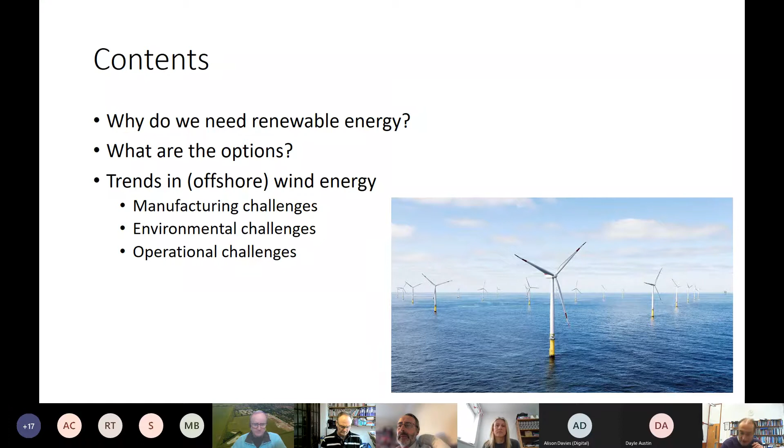So, as I say, you're probably very familiar with this, but sometimes it's useful to remind ourselves of what the challenges are and why we're doing this. The graph on the left is showing two things really: the growth in population, which we're very familiar with, and also the growth in energy use over the last 150, 170 years. Clearly, energy use is growing faster than the population, so the pro rata use of energy is increasing. As we become wealthier, more developed, we're each using more and more energy. And that's leading to more and more CO2 emissions.

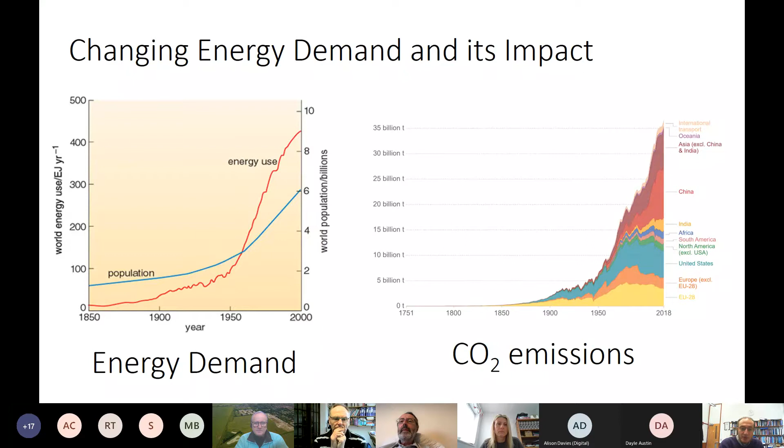The graph on the right is showing how that's split between different regions. Actually, Europe and the US, in a sense, are doing okay. They are reducing their carbon emissions, but places like China and India are still growing quite strongly, and the overall total is growing hugely. So you'll be familiar with some of this, but it's good to remind ourselves from time to time. This shows the projections of what that might lead to.

So the solid line at the left of this shows what we have been doing for the last 30 years. The projections going forward are what the options might look like depending on what we do from here on in. And essentially, starting at the top, if we hadn't done anything to reduce our carbon emissions, then we'd be looking at a 4 to 5 degree temperature rise.

Fortunately, we are doing some things. So current policies, if they're maintained, would limit the temperature increase to around 3 degrees. If politicians and others fulfill what they say they'll do, then that brings it down to 2.5 to 3 degrees. But that's still a long way short of where we need to be, which is really the 1.5 degree pathway. So it's still a huge amount of work to do.

And just in terms of what those temperatures mean, even 2 or 3 degrees, as we're already starting to see, is more forest fires, more droughts, more extreme weather. So the importance of addressing these, I think, is coming home to people, and policies are moving in the right direction, but there's still a long way to go. And policies only go so far. If you haven't got the technology to deliver on some of those things, the policies can't really achieve very much.

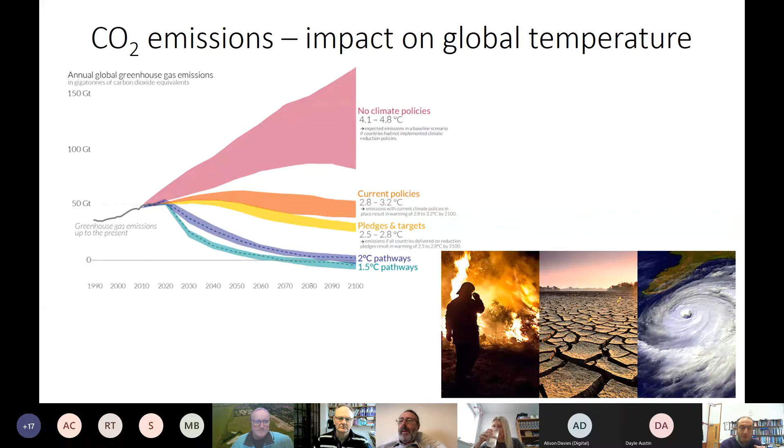So clearly, there's a demand for renewable energy, and there are options available to us. So I've not really thought about what does renewable mean. I think quite a useful definition of renewable energy is a source that's replenished on human timescales. So things like solar are kind of instantaneous. Biofuels might take a year to grow something and replenish it. So that kind of is replenished on a human timescale.

But if you think about coal, you're then talking about millions of years, and so it isn't replenished on a human timescale. So if you're looking for how to demark renewable and non-renewable energy sources, then I think that's quite a useful way of thinking about it. And these are the main options available. So wind, marine is wave and tidal, which I'll say a little bit about. Solar, we're familiar with. Hydro, we're very familiar with. Geothermal, extracting heat from the ground or maybe the air. And then various sorts of bioenergy.

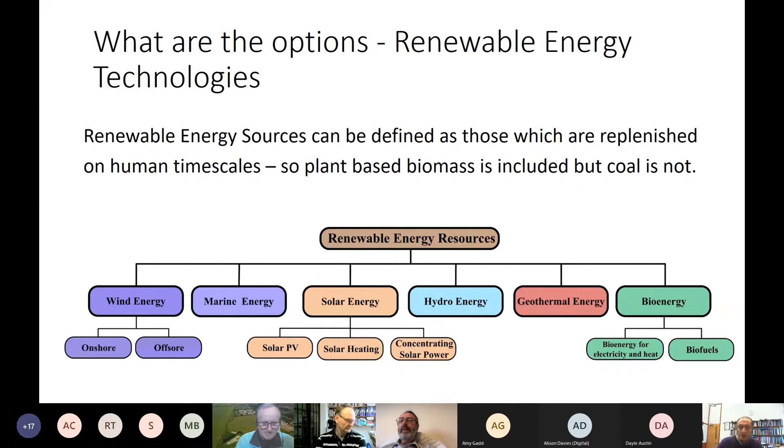And all, I think, have their place in the future energy mix. But it's also important to think about what are the advantages and disadvantages of each of them in general and in the UK specifically, but also in terms of how much energy they can actually provide. And I think this is quite a useful illustration to understand that. So essentially, the size of these circles represents the amount of energy that's available. So if we captured all of the available energy, how much would that be? And the numbers shown, let me just get a pointer, are illustrating how many times over that source of energy could fulfill the world's needs.

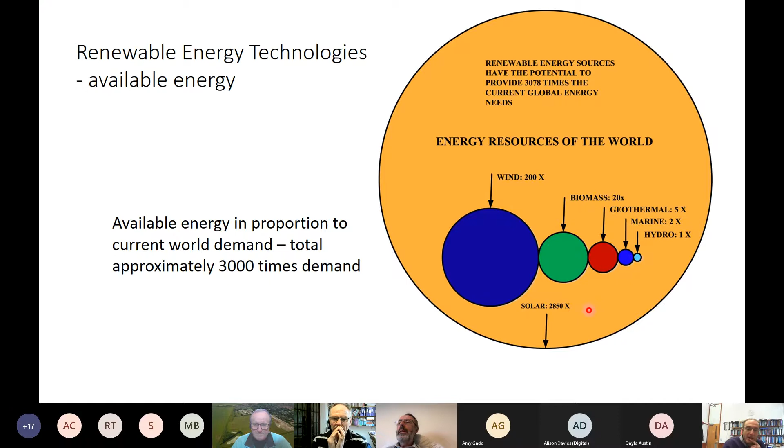So for instance, solar energy could provide all of the world's energy use 2,850 times over, which is great. It would mean covering the whole Earth with solar cells. So there's a limit to that. If you look at wind, it could provide 200 times the Earth's demand, biomass 20. But if you look at hydro, even if you exploited all of the hydro energy that is out there, we would still only meet the world's demand once over, and there would be no spare capacity there. So I think it's important to understand how much of these different sorts of energy there are, and one way of thinking about that is thinking about where the energy comes from.

So apologies, this is rather a busy diagram, but what it's meant to be showing is where the ultimate source of energy is coming from, and what kind of transformations it has to go through to be usable. And as it goes through each of those transitions, we lose a proportion of the available energy. So the more transitions it has to go through, the less energy there will be available at the end of that. So, for instance, the main source of energy for the Earth is the sun, and so if we directly convert the sun's energy through solar converters, then we get a lot of energy because it's a very direct process.

If you looked at the wind, for instance, you require the sun to generate winds and the Earth's rotational energy to shape it, but that's quite a direct transition, and so we get quite a lot of energy in the wind. But if you look at hydro, you need the sun to evaporate moisture, you need the wind to transport it from over the sea to over the land, and those processes are quite inefficient. So by the time you've got water ready for your hydro system, it's got a very small proportion of the original energy that was put into it, and so it's not able to supply a large proportion of what's required.

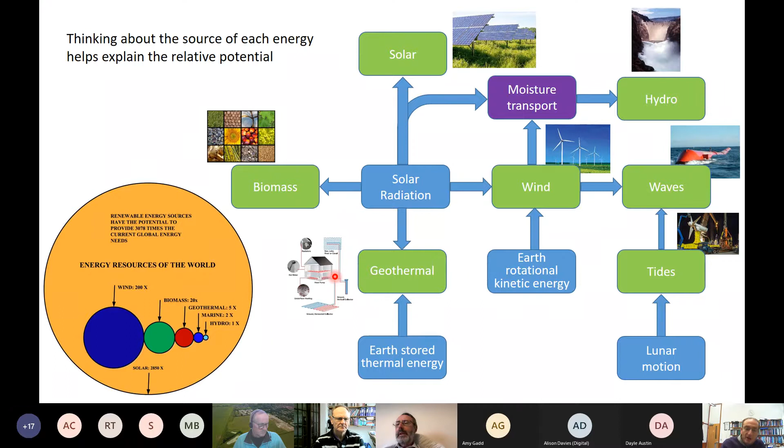I'll say a little bit more about wind energy, and then look at how we do the comparison between different energy sources. As you'll be aware, the wind is driven by the sun warming the atmosphere, and then that movement of air is shaped by the rotation of the Earth. The Earth drags the atmosphere around with it, and so we get these quite complex patterns of winds around the Earth, and different regions obviously have different patterns of wind energy.

That's also shaped by the local topology, the land surface, and particularly the roughness of the Earth affects how much wind energy is available. And it just so happens that the UK has some of the best wind resource in the world. This map on the right-hand side shows how much energy is available in different regions from the wind. Rather confusingly, red means there's not much energy at all. Yellow and green means there's lots of energy.

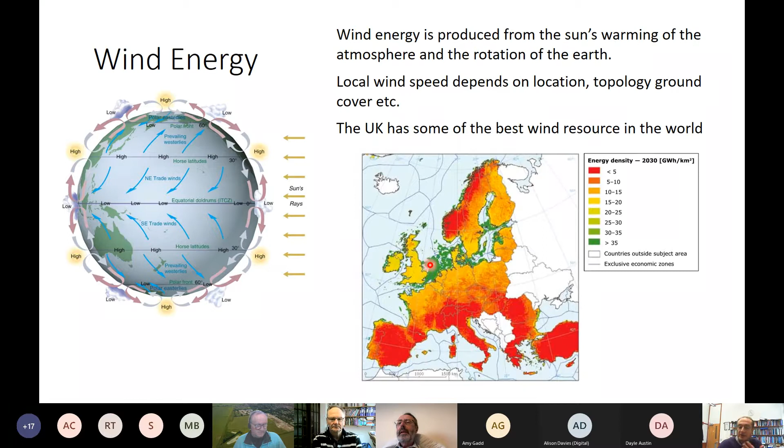And so the best places in Europe and actually in the world are in the North Sea, which is very convenient for us. It's also very convenient that the North Sea happens to be very shallow, and so it's relatively easy, I say relatively easy, to exploit that resource.

As an engineer, I couldn't avoid putting one equation into a presentation. This is an equation for the power that you can get from a wind turbine. I only put this in because it's important to understand the key factors in getting as much energy from the wind as we can. The power is a half. CP is just a measure of how efficient our turbine is, and there's a limit to that. You can't get more than 59% of the available energy out of the wind.

Rho is the density of the air. We can't do much about that. AT is the area of the rotor. So if we can make the rotor bigger, we get more power. If we double the radius, we get 4 times as much power. And then the key one is the wind speed, U cubed. If we double the wind speed, we actually get 8 times as much power. So what we really want is large turbines, big AT, and high wind speeds.

You'll probably be very aware of how the size of turbines has increased over the last few years to an incredible extent. We now have turbines getting on for 10 times the size of what they were even 30 years ago. That increases the area, but making them taller also increases the wind speed, because the wind speed increases as you go further up.

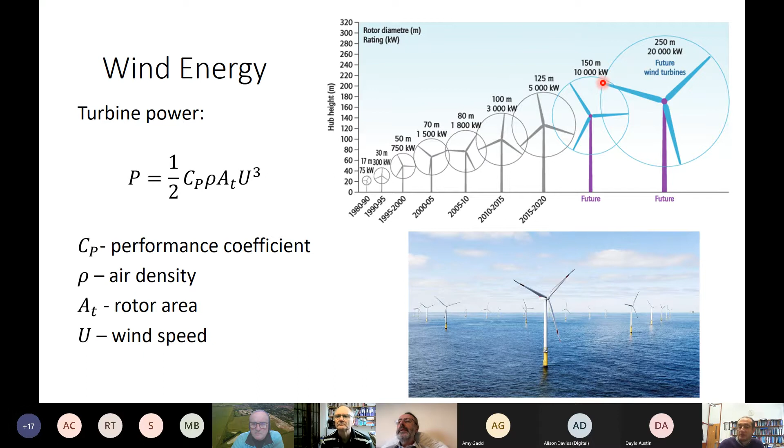Similarly, for oil, natural gas, they all have relatively large amounts. Obviously, there's lots of talk about carbon capture and storage. So, you burn coal or gas, but you capture the CO2 that's emitted. One of the issues is that even the most efficient current processes are not that efficient. They don't capture all of the CO2. So although the CO2 emissions are a lot lower, they're only maybe 80% lower than if you burnt that fuel without the carbon capture. So even with carbon capture and storage, there's still relatively large CO2 emissions.

Nuclear, as you would expect, is quite low. Biomass is not so low, because there's a lot of fuel used in transportation, fertilizers, and so on. Solar is quite a lot, because there's actually a lot of energy used in the manufacturing processes. Geothermal is relatively good. The best ones in terms of CO2 are onshore and offshore wind.

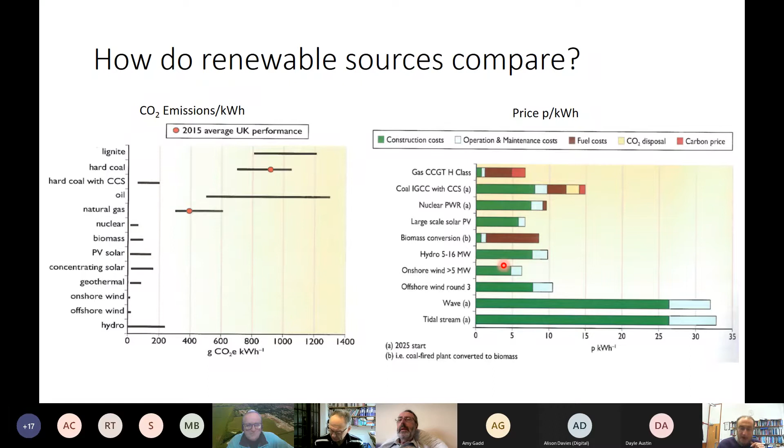One other comparison, which I'll show, it's a little bit less appealing, is around the health and safety of these different renewable energy sources. And one measure of that is the number of people who are killed in the process of generating that power. As I say, not a particularly nice thing to think about, but it is important in the overall picture. And again, some quite surprising comparisons. So if you look at those technologies, it's not obvious which are the safest and which have the biggest issues around health and safety.

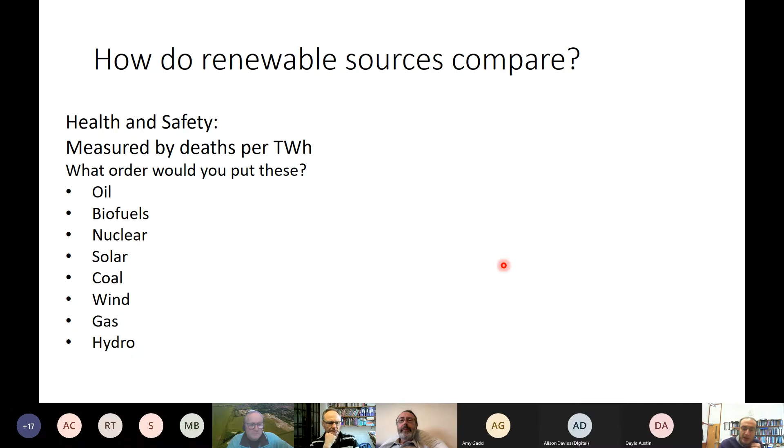And if you look at the data, what it shows is that actually the worst is coal, because there are lots of people killed in coal mines, particularly in some areas of the world where health and safety rules are not so carefully applied. Similarly, oil is quite a dangerous industry. Nuclear, you might think, is a very dangerous industry, but because it is so dangerous, it's so well regulated that actually it is a very safe industry.

Hydro in itself is relatively safe, but as we've seen a few times, unfortunately, when a dam fails, potentially there's a very large impact and potentially large numbers of deaths. Solar, the issue there is people falling off roofs while installing solar panels. Wind is relatively safe, and again, that's partly because it's quite a well-regulated, well-managed industry.

What I would say is some of these figures are a little bit open to challenge. So, for instance, nuclear, there are direct deaths and then there are indirect deaths. So depending on who you talk to, the effects of the Chernobyl nuclear disaster were officially 31 people were killed in that, but obviously there are lots of people killed because of the radiation and the fallout from that. So these are open to some challenge.

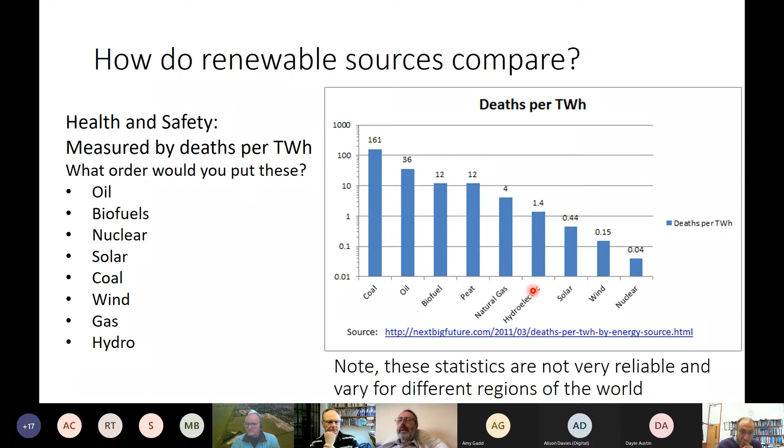Okay, so hopefully that's kind of established that wind energy is one of the key things, and particularly in the UK is one of the key things. So moving to how that sector is developing, there are really 3 elements. One is that they're just getting bigger and bigger. So the rate of increase is incredible.

So I work closely with the blade factory in Hull. When it was opened, I think 3 years ago, they were making 75-meter blades. They've since had to knock the end walls out to extend it because they're making 83-meter blades, and now they're starting to look at 110-ish meter blades, and other manufacturers are doing the same. So these things are huge structures, very difficult to manufacture cost effectively, difficult to transport, difficult to generally deal with.

So getting bigger, getting into more remote locations. So there's a number of drivers for that. So as you move further from shore, the wind becomes stronger and more consistent, and that's one of the things that you really need is strong and consistent wind.

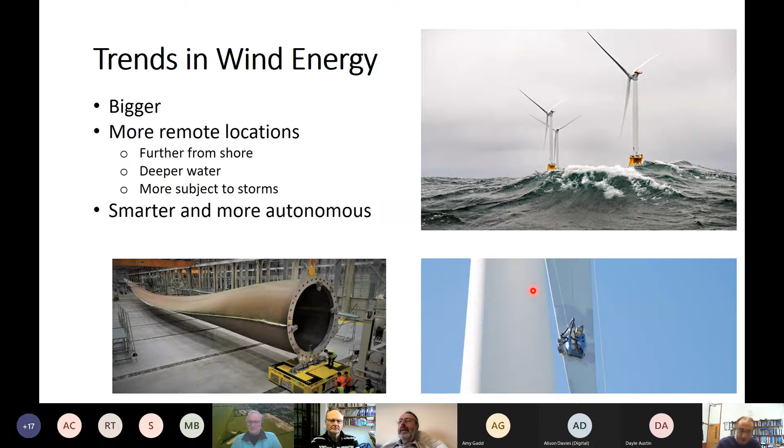So just picking apart some of those, I'll talk about some of the manufacturing challenges first. And this is something where I've been doing quite a bit of work to try and improve the processes and understand some of the processes. And again, these things are huge. They're quite, in some ways, simple structures.

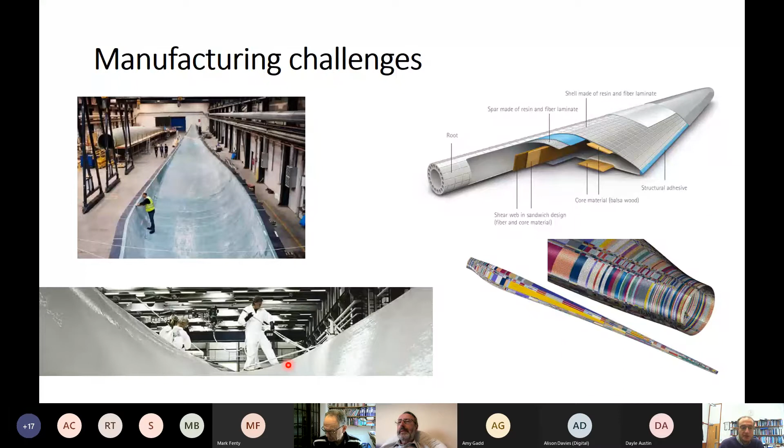You lay up all the layers, close a mould, and then inject epoxy resin into it that then cures and makes the solid blade. So it's a mixture of quite a lot of manual processes and then some limited automation, but trying to improve that, make it more consistent, more automated is quite a big push within the industry.

What would be nice is if we could get nice smooth wind that was flowing consistently all at the same speed. But what you actually get is different winds at different heights. So as you go up in the atmosphere, generally the wind speed increases, but it's not smooth, it's turbulent, it's mixed. And so this turbine gets buffeted by changing wind speeds. You get things like low-level jetting, where you get extreme winds at relatively low levels that then cause a big effect.

You have things like ice, so these are operating in some quite cold atmospheres, and if you imagine a 100-meter long blade spinning around with large lumps of ice attached to it, that's obviously got a potential for a lot of danger associated with it. Lightning: if you're out in the sea, a 150-meter, 200-meter tall wind turbine is a great attractor for lightning, and potentially that lightning can do a lot of damage to a turbine.

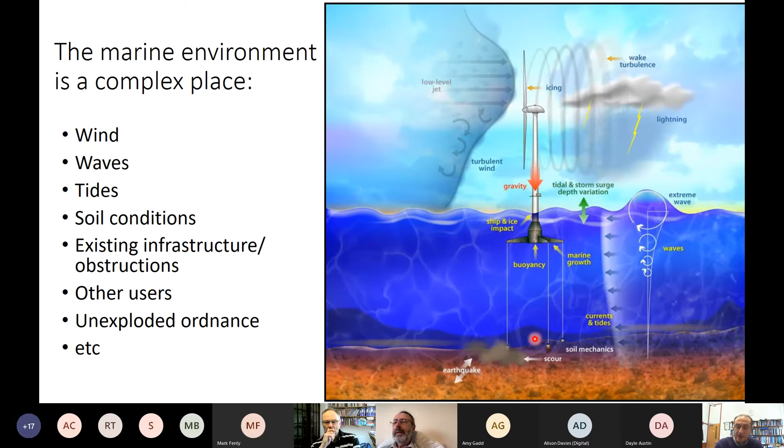Also, the depth of the sea is quite variable, and so it's much easier to install turbines in shallow sea, but there's only a limited amount of space where there is that shallow sea. And we are talking about very large areas of seabed that we need to use. So you'll probably be aware of the Hornsea offshore wind development. If you take the 4 Hornsea offshore wind farms together, from west to east is the same distance as from Liverpool to Hull. They are huge areas of seabed that are being used for these installations.

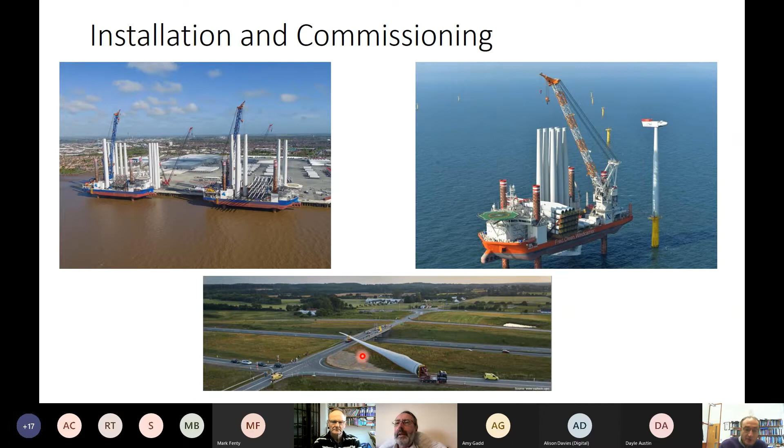Another issue is around access to turbines. So although we try and reduce the amount of time people spend on turbines, it does have to happen. There has been huge progress in improving that. So it used to be that typically you would have to spend a week on a turbine getting it commissioned and then visit it several times in the following months to iron out little problems. Now, typically once it's installed, as I say, in one day, you're then talking it may not be visited for another 6 months, but you do still need to.

And traditionally, the way that's been done is with what's called a crew transfer vessel, or what some people refer to as bump and jump, where the vessel essentially sails up to the turbine and then the technicians have to jump across. And I'll just play this video to illustrate what that looks like.

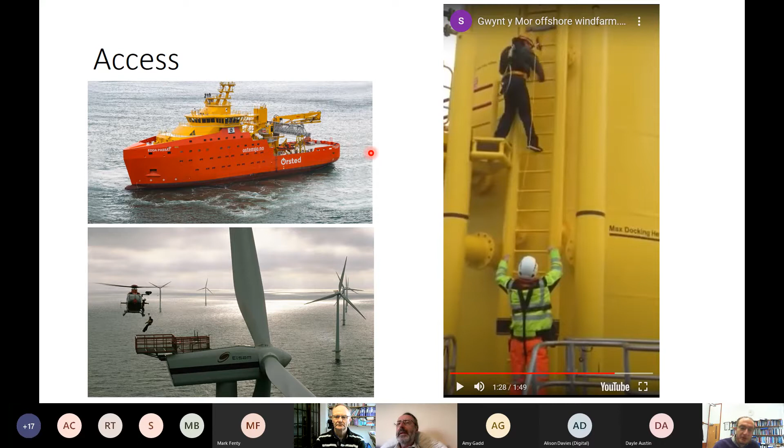So what we would like to do is avoid that and try and make the system smarter and more autonomous. And so even now, turbines have lots of sensors to measure all kinds of things. So temperatures in gearboxes, electrical quantities, gearbox condition, movement of the tower, movement of the blades, and so on. And they generate literally gigabytes of data. So the amounts of data that these generate is huge. And one of the problems is that there's so much data that in lots of cases, no one really knows what to do with it all.

They're all connected together. So a whole wind farm will be connected together with fibre optics that then feed into a control room. So some of you may be aware of the East Coast hub for Ørsted in Grimsby, where all of their East Coast turbines are monitored and checked. And essentially what they're trying to do is three things. They're trying to detect if something's gone wrong. So maybe if there's a problem in a gearbox, they may just initially say, okay, there's a problem with this.

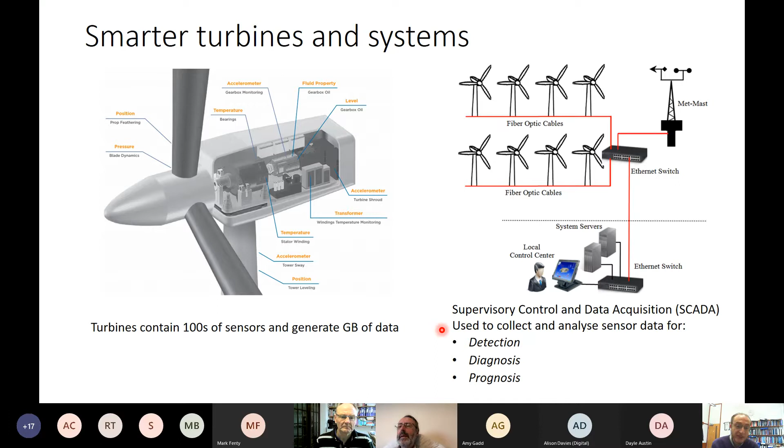Then they're trying to work out what is the problem. So it's a damage to a tooth in a gearbox, so they know what it is and maybe where in the system it is. But then also importantly, how quickly is that going to deteriorate, and at what point do they need to do something about it? Because as we've seen, getting access to these turbines is a challenge. You want to be able to plan it so you use the best weather window that you can, and so understanding, is this something I need to fix today, or can I leave it for a couple of weeks, is an important consideration.

But that needs smart sensors, and some of the quantities that we want to measure aren't that easy to measure. So some of the work we've been doing is looking at putting smarter sensors into wind turbine blades. And that's important. So the blades of a wind turbine have a pretty hard time. The tips typically travel at about 200 kilometers an hour, and they'll rotate around 50 million times in a lifetime. So there's a lot of fatigue, lots of opportunities for damage.

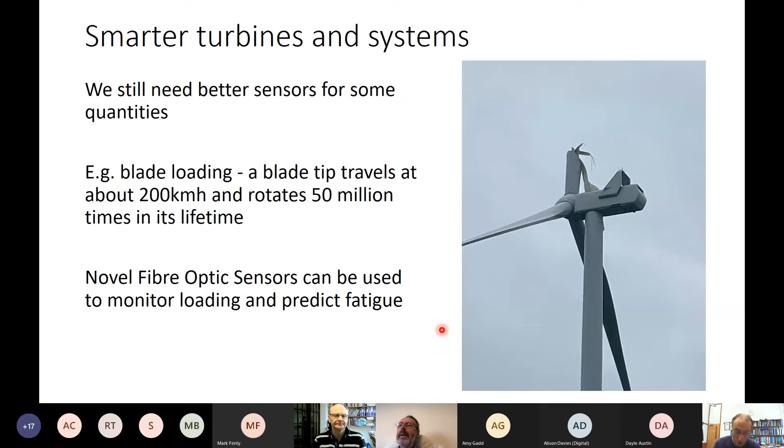And what you want to do is know that there's a problem before you get to the state that turbine on the right-hand side has reached. Potentially, if a blade breaks like that, it can hit the tower and the whole turbine can be destroyed. If you know that it's approaching the end of its life, then you can plan some action to either repair or replace it. And so what we're looking at is using fibre optic sensors to do that.

So just very quickly illustrate how that works. Essentially, a fibre optic is a tube carrying light down it. And what we can do is change the internal structure of that by putting in what's called a grating. So it's like a filter that allows some light through and reflects other light.

So if we pass a spectrum of light down that fibre optic, then the way we've made that grating will cause some of the light to be reflected, in this case the green light, and then the rest of the spectrum will pass through it. And what we can do is look at the shape of that light to work out what's going on in that grating. And if we stretch that piece of glass fibre, it will change the shape of that and it will change the reflected light.

And so monitoring that change in the wavelength of light coming back allows us to monitor the strain that is applied in that fibre optic. And so what we're looking at is putting multiple sensors in, a whole network of sensors. So we'll get a whole load of these peaks in the spectrum, but it will tell us what's the strain at this point here, or this point here, or this point here. And from that, we can deduce how much fatigue that wind turbine has been subject to and whether it's starting to be damaged and deteriorating.

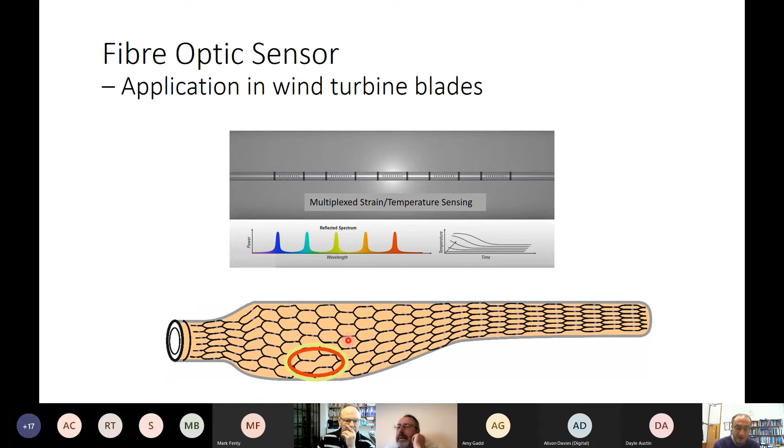But more widely, there are things that we can detect with sensors, but there are also things that we can't very easily detect. And so again, having autonomous systems for inspection and repair is an important area in the industry. So, as I said before, these wind turbine blades are typically doing 200 kilometers an hour, passing through rain, hail, snow, salt, and so you get a lot of damage to the front of the blade.

If you imagine driving your car at 200 kilometers an hour for, I think it's about 3 million miles or 3 million kilometers, you'd expect to get quite a bit of damage at the front of your bonnet, and that's what you get in these blades. And that has a big impact on the amount of energy that you extract. So there's a lot of pressure to inspect and potentially repair these kind of blades.

And conventionally, what it involves is a technician sliding down a rope, inspecting the front of the blade, and then using filler and a sander to replace that. Not a job that would appeal to everyone, and although it looks quite pleasant on a sunny day like that in the photo, it's not so easy when the wind's blowing and the rain's falling.

So already there's a lot of work around using drones to do the inspection. So having drones flying up and down the blades, doing the inspection, automating the analysis process, and then moving towards robots that can then crawl along a blade and carry out the repair.

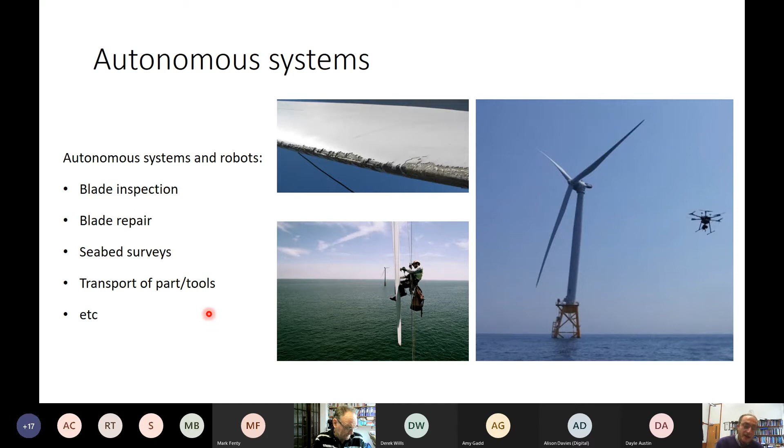There are lots of other repairs that need doing, and some of them are much more challenging for autonomous systems because of the size and weight of the structures that you're talking about. Replacing a blade would require such a huge autonomous system that it's probably not practical, but some of the other inspection and repair processes are possible. And then there are things like surveying the seabed, transporting parts and tools that are starting to be developed. So that's the kind of current state and where things are moving to. But we're only really just beginning.

So this is an image from the recent white paper around energy, showing that the role of renewables is probably going to be increased by a factor of about 4 over the next 30 years. In the case of offshore wind, it's expected to increase fourfold within the next 10 years. So going from 10 gigawatts to about 40 gigawatts and then to 75 gigawatts. So huge opportunities there and huge need for skills.

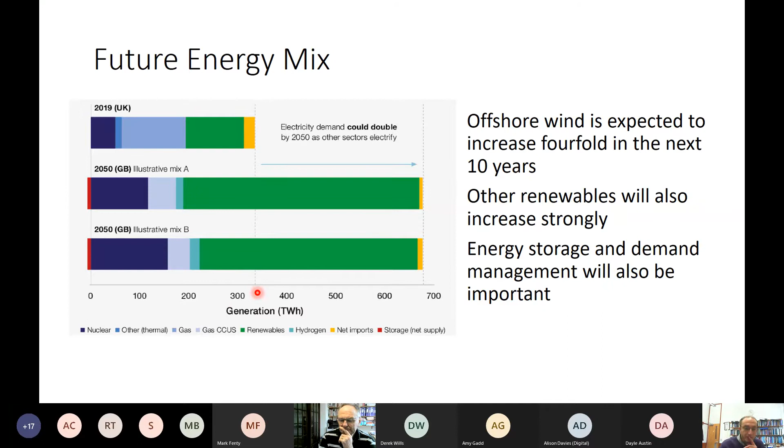Also energy storage, because obviously the wind is intermittent, solar energy is intermittent, so energy storage and management of the demand so that you can try and match demand to when the energy is available will be important. So just to wrap up, that has a big implication in terms of the future skills that will be required. Conventionally, when people talk about skills in offshore wind, people tend to think of technicians who will shimmy up and down wind turbine blades, or engineers who design blades. But actually there are a huge range of other skills that are involved.

So as hopefully you've seen, there's lots of work in terms of IT and data science, understanding all those gigabytes of data and interpreting them, understanding the environment, both in terms of how is the wind affected, but also how does the offshore wind installation affect the environment that it's operating in. So things like movement of the seabed, noise, how are those affecting the animal life? Lots of challenges around manufacturing and materials, but also project management and planning and so on.